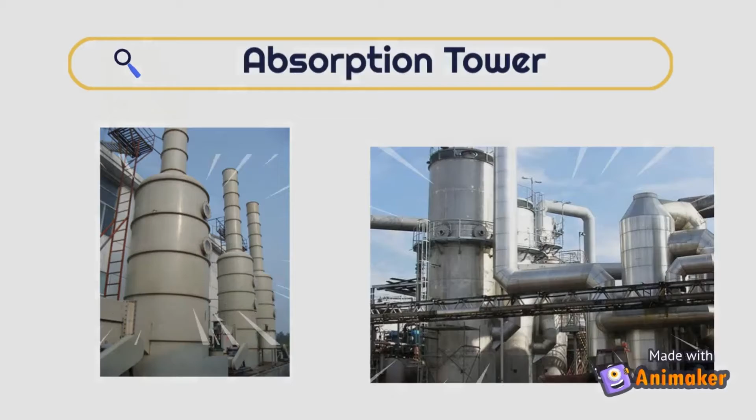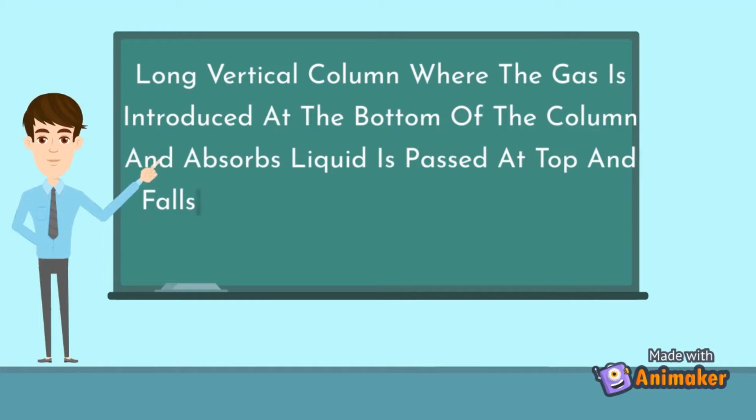For example, absorption. Hey, do you ever wonder what tower and column present in the chemical plant? Don't know. Don't worry. In this video, we will explain to you one of the common towers in a chemical plant, which is absorption tower. So, what is absorption tower? Absorption tower is a long vertical column where the gas is introduced at the bottom of the column and absorber liquid is passed at top and falls down against the countercurrent gas.

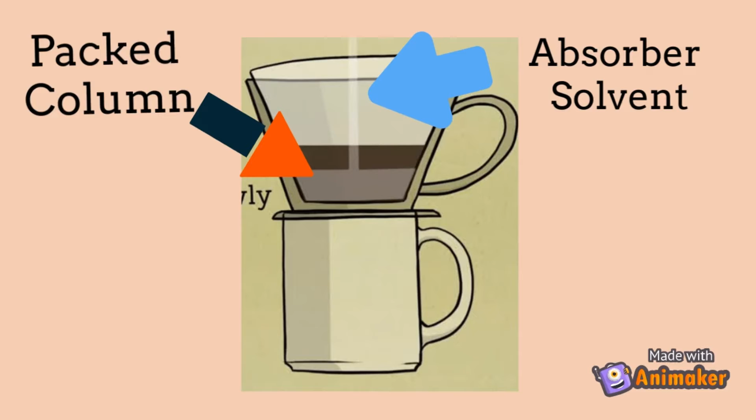Don't understand? No. Never mind. Just link it to the process of making the coffee. Making coffee? Yes. In making the coffee, we commonly pour the water into the filter that contains the ground coffee. Then gravity will take the solution into our cup. The water that we pour acts like the absorber solvent. And the coffee ground in the filter acts like the packed column.

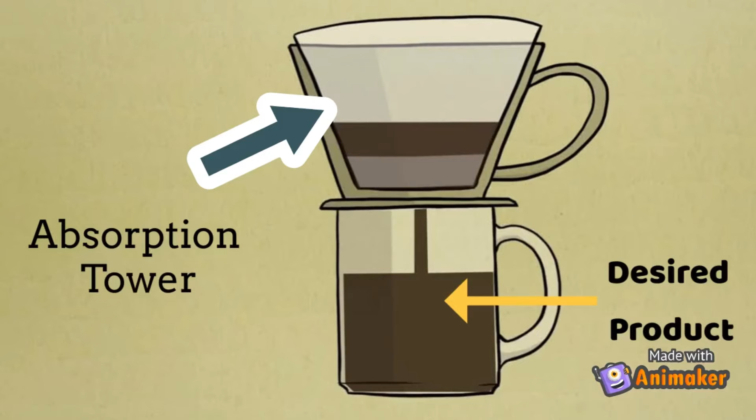The filter will act like an absorption tower, which will filter the mixture of water and coffee ground to produce our desired product, which is the coffee. So the process of absorption tower is like you making a cup of coffee. What is the type and function of an absorption tower? The main function of the absorption towers is to absorb different types of impurities in gas streams.

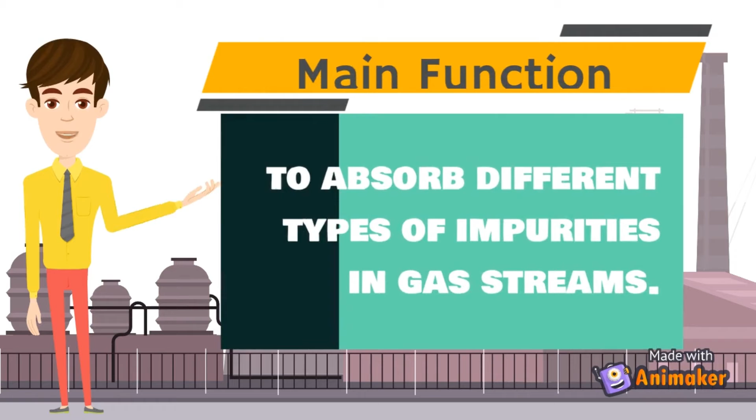Other than that, we also can use the absorption towers for distillation purposes, stripping purposes, adsorption purposes, and extraction purposes. In distillation purposes, its function is to separate liquids from non-volatile solids. In stripping purposes, it is to remove the harmful contaminants from waste streams.

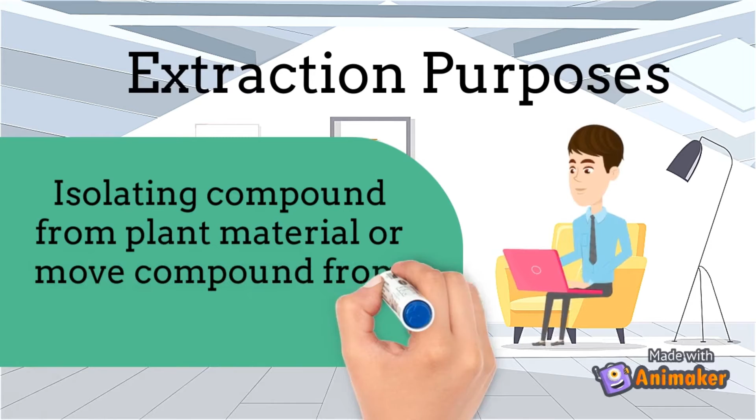For adsorption purposes, it is the deposition of molecular species onto the surface. Lastly, the extraction purpose in the absorption tower is used as the most important liquid-liquid separation process, which is isolating compound from plant material, or moving compound from one liquid to another.

Now I will introduce what are the main components of the absorption tower. The first component is mesh pad. It is used to filter out impurities from different sources. And it also helps to eliminate liquid droplets and mist from entering the vapor stream outlet.

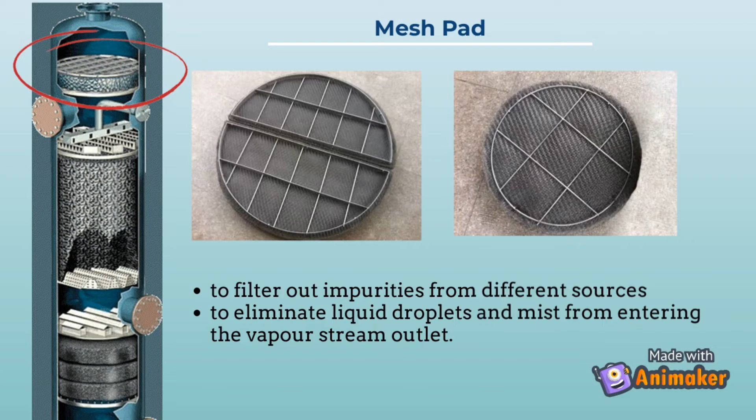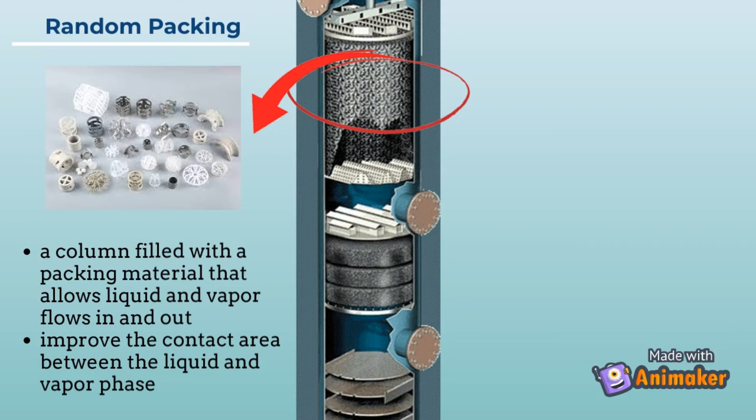There are two types of packing. The first one is random packing. Random packing is a column filled with a packing material that allows liquid and vapor to flow in and out. It improves the contact area between the liquid and vapor phase. The second one is structured packing. It provides a large surface area for the liquid to contact without causing resistance that impedes the liquid's flow.

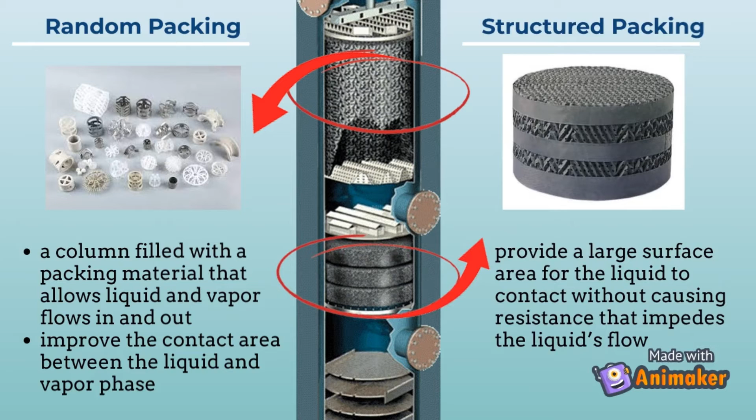There are two types of packing support grate. The first one is multi-beam packing support. Multi-beam packing support is designed for random packing. It is a support grid with flat bars to hold the random packing materials. The second one is packing support grating plate. Packing support grating plate is designed for structured packing. It is a basic framework designed to give extra mechanical support to structured packing materials.

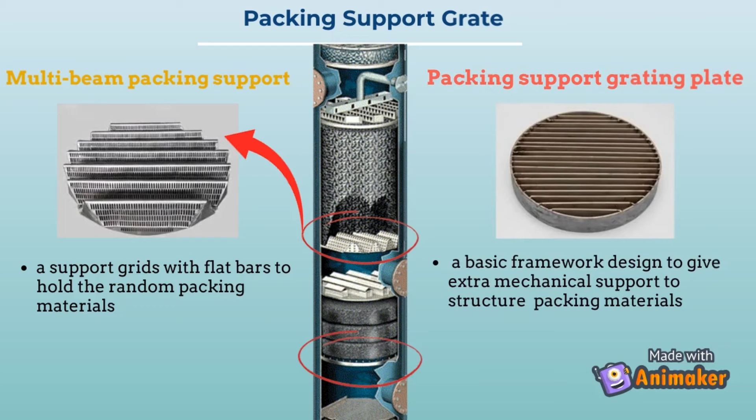Other components are the trays. Trays can be divided into two major categories, including counterflow and cross-flow trays. Different types of trays perform different functions in sieving different types of impurities.

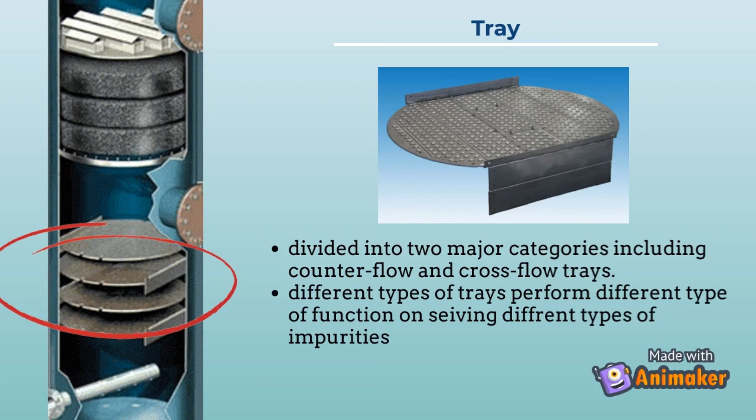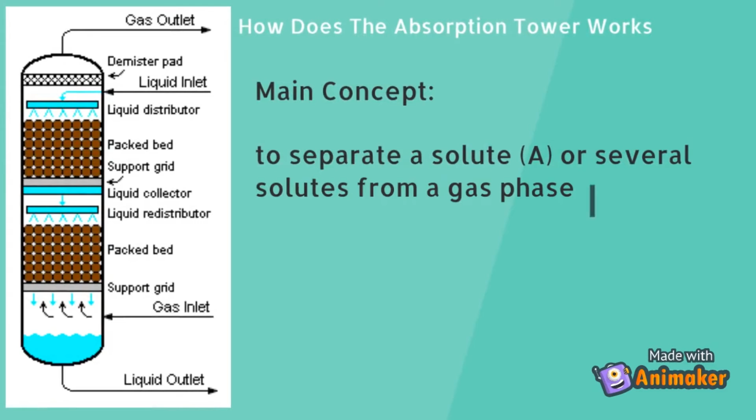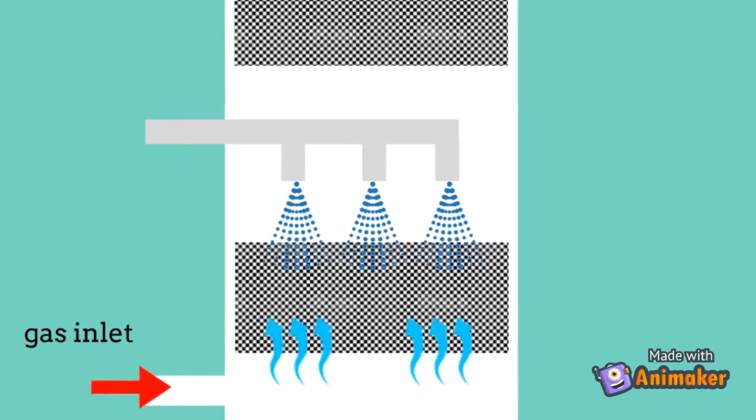Now we move on to how the absorption tower works. The main concept of the absorption tower is to separate a solute, or several solutes, from a gas phase by contacting the gas with a liquid phase. First, the gas containing the solute A is introduced into the absorption tower gas inlet at the bottom. Then the gas rises through the packed section and the liquid is sprayed evenly onto the packed section.

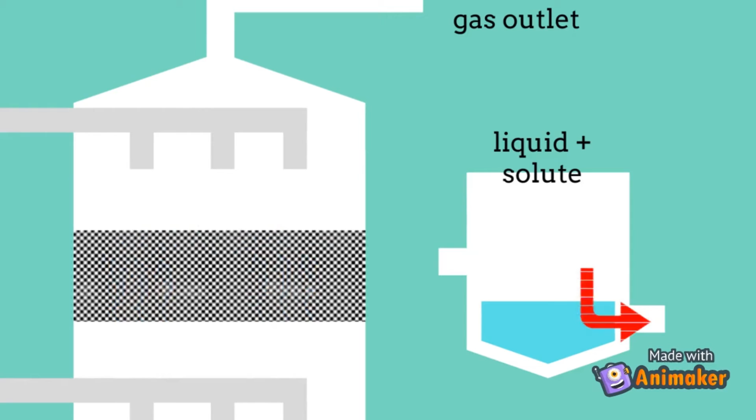The contact part is the sector where water and gas meet. And it enhances the contact efficiency between water and gas. The gas-liquid contact part can be comprised of a few stages to facilitate the absorption process of solute from the gas. The liquid will carry the solutes towards the bottom of the absorption tower through the liquid outlet, while the gas will flow upwards and out of the absorption tower through the gas outlet.

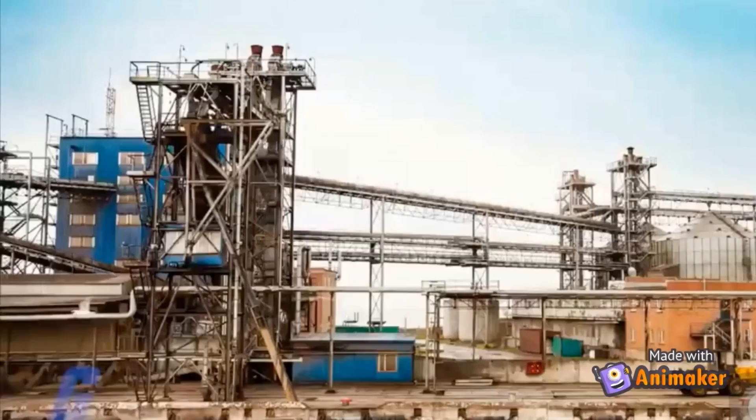Hi friends. After understanding the functions and working of the absorption tower, do you know what are the applications of the absorption tower? No, can you tell us? Let me tell you what are the applications of the absorption tower. Absorption tower is mostly used in heavy industry as first process membrane industry, such as petrochemical industry and chemical industry. Absorption tower which acts as membrane of industry will capture carbon dioxide evolved. This helps to remove the pollutant gas from the industrial process.

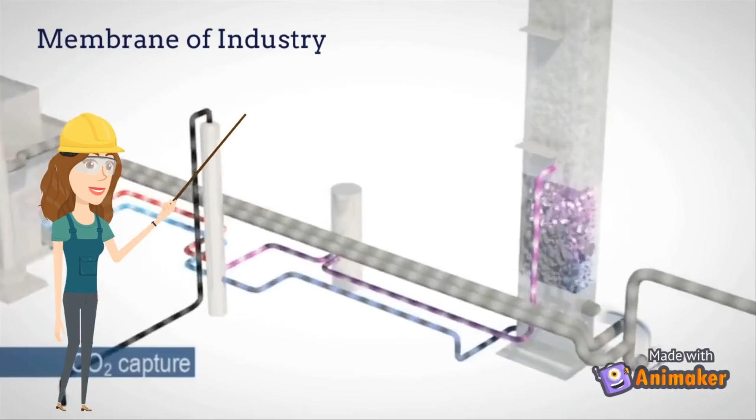It absorbs 40% of man-made carbon dioxide emission, as absorption process is the most efficient way to reduce carbon dioxide emission. In hydrogenation of oil process, absorption tower can separate the undesired products or impurities in order to recover the product. For example, it can strip volatile hydrocarbons such as ethane and gasoline for the recovery of propane.

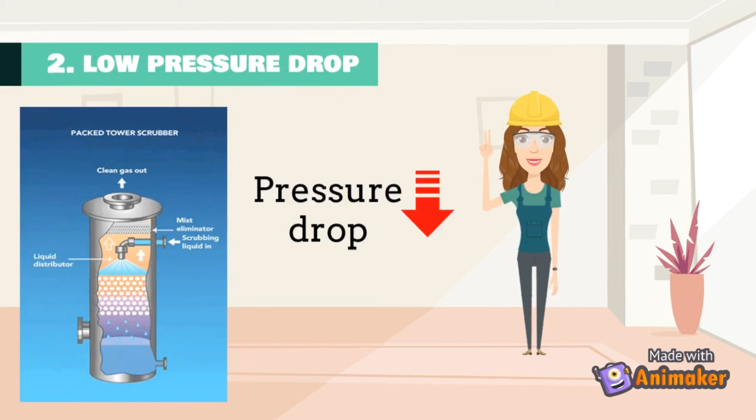After knowing the applications of the absorption tower, do you know the advantages of the absorption tower? No. So, what are the advantages? Let me tell you. The most important advantage of the absorption tower is low-cost equipment. In comparison to the cost of other equipment, you will not spend a lot of money to purchase the absorption towers. The cost is often quite affordable in relation to the benefits that you will derive from using the absorption towers. Second, absorption tower has low pressure drop. You will also experience low pressure drops across the entire absorption tower.

Third, the absorption tower is a continuous operation. If you maintain the absorption towers well, you will experience very minimal downtime, thus continuous operations. Lastly, absorption tower can absorb solid impurities. You can also readily employ the absorption towers in the absorption of different impurities, including solid substances. That's all from us. Do you have a better understanding about absorption tower?